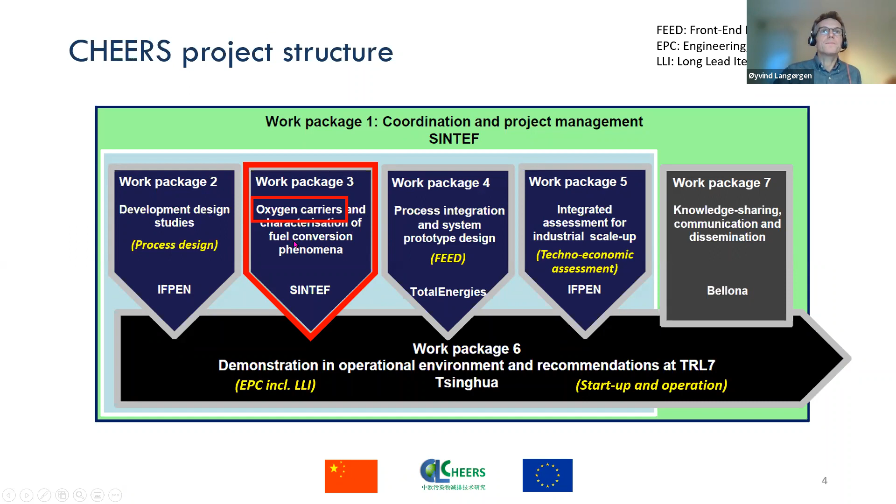The oxygen carrier material is in fact a cornerstone of the CLC process. It is normally in the form of metal oxide particles that take up oxygen from hot air in the air reactor in a highly exothermic reaction, generating heat. The oxygen carrier material transports the oxygen and the heat to the fuel reactor, where they are used to sustain the fuel conversion, which can be slightly endothermic or slightly exothermic, depending on the fuel and oxygen carrier chosen. In this respect, CLC belongs to the oxy-combustion CO2 capture technologies, but the oxygen separation is an inherent part of the process.

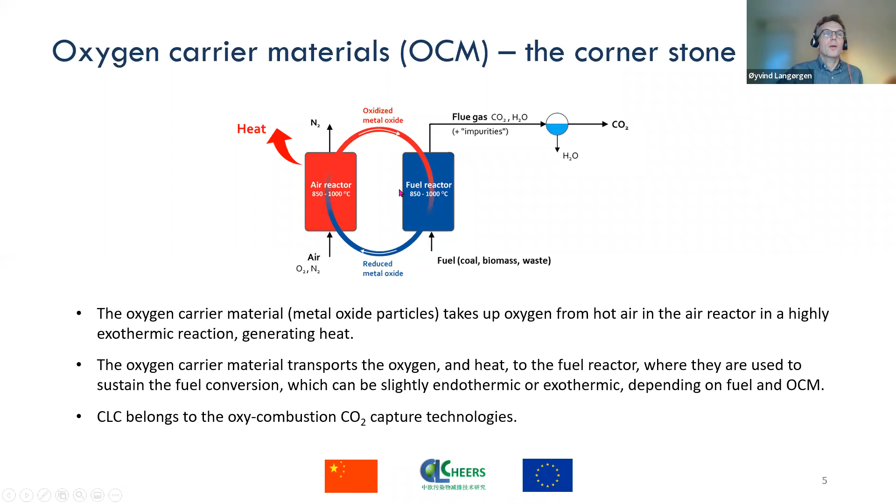CLC is most commonly realized using fluidized bed technology. So from this simple reactor principle, we go up to a very simplified scheme of two circulating fluidized bed reactors working together. And higher up in level, a real plant, such as this, which is the 3D model of the Cheers demo unit.

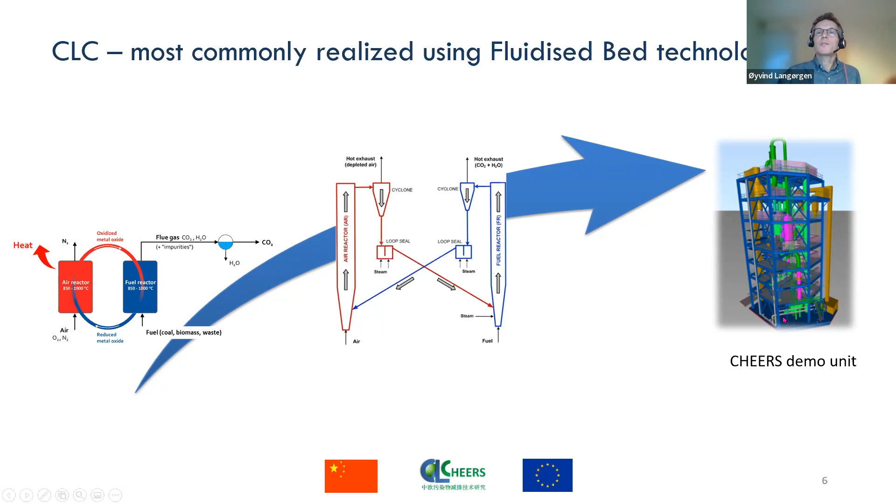The demo unit in Cheers has been made flexible, so it holds two different process configurations. A European configuration shown here, where the application case is steam and power generation in a refinery. The main feedstock is petcoke, which is very high in fixed carbon, low amount of volatiles. It also contains some sulfur. This design is from Total Energies and IFPEN, and you see we have a carbon stripper at the top of the fuel reactor, and we have L-valves to control the oxygen carrier circulation. Biomass is an additional or optional fuel that can be relevant.

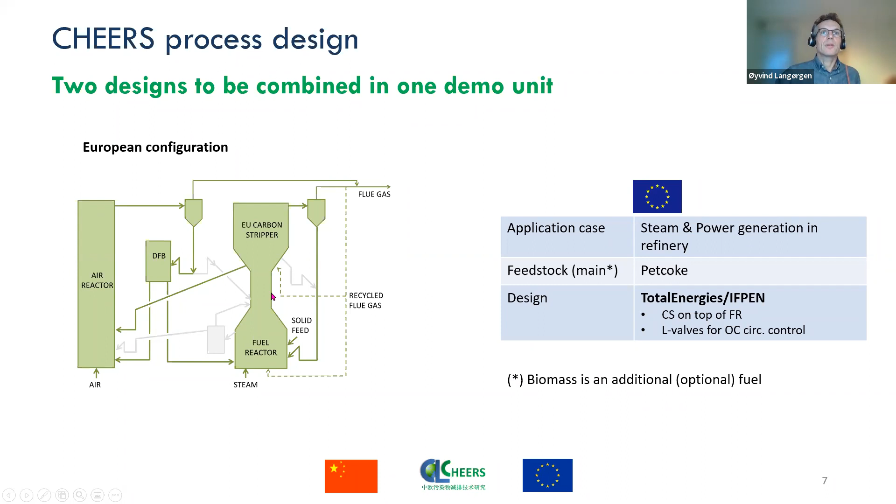Then we have the Chinese configuration using the same demo unit with some changes of the process lines. The application case here is power generation. The main feedstock is lignite, much more volatile content. And this design is from Tsinghua and Dongfang Boiler. And you see the carbon stripper is beside the fuel reactor, and the oxygen carrier circulation is controlled by fuel reactor overflow.

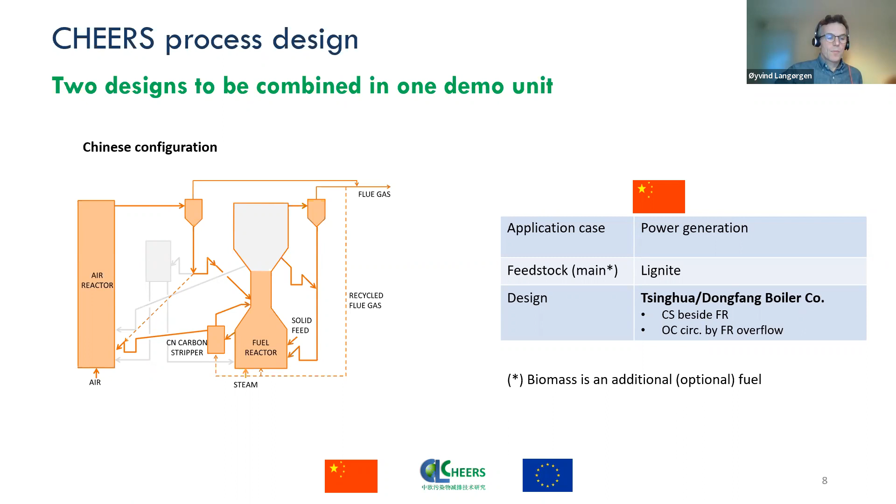Okay, so a little bit about the agenda for the rest of the presentations. We started out with a lot of candidates, both acquired natural ores and some synthetic materials that were manufactured within the project. And the main results of this first screening of these candidates will be presented by Yngve Larring at SINTEF Industry.

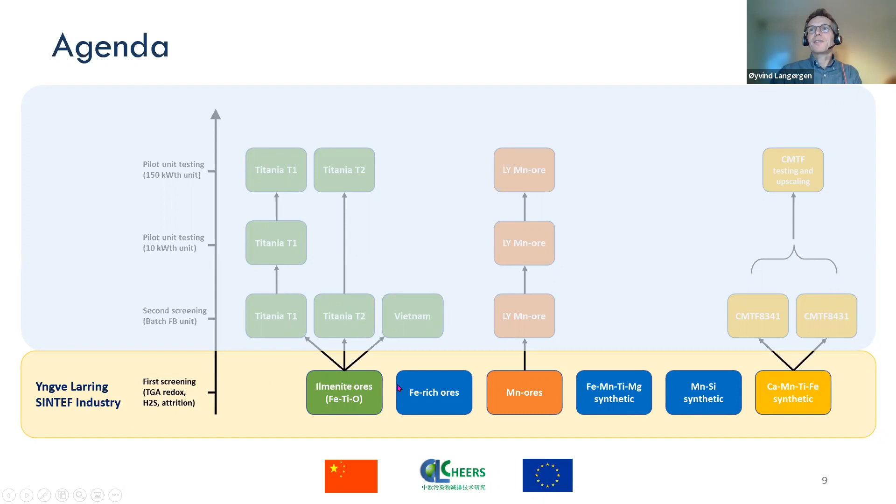Some of the candidates were taken further to a second screening in a batch fluidized bed unit, both natural ores and also some of the synthetic materials, the perovskites here. And from this, some were tested also in a 10 kilowatt unit at IFPEN. And this will be presented by Kristina Bakoc.

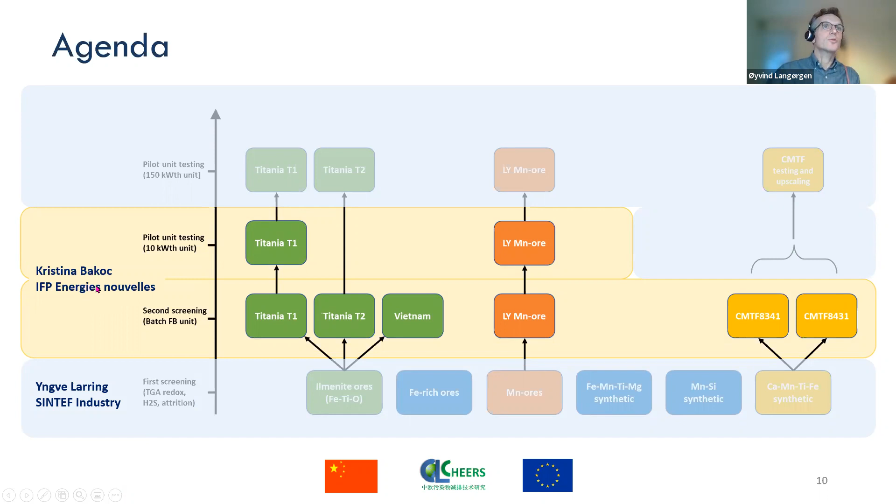Then Inge Saanum from SINTEF will present test work that has been done on a 150 kilowatt unit at SINTEF, where these natural ores, minerals, have been tested. Yes, but we have not forgotten the perovskite, the synthetic material either, so it is followed up at Tsinghua University, and the results from this work will be presented by Lei Liu from Tsinghua.

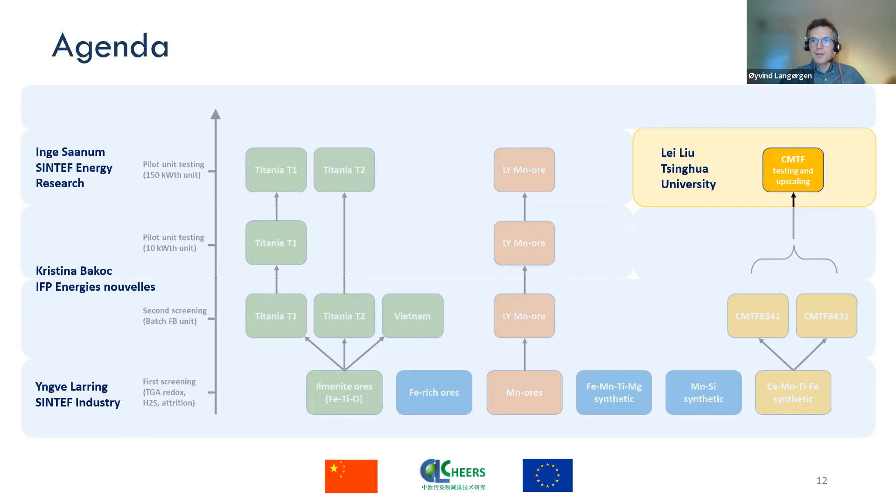Yes, I think this was in short a first overview here. So then I would like to give the word to Yngve Larring at SINTEF Industry.

And thank you. Give him the control here. Yes. Can I have the control here now?

Yes, SINTEF's task was the pre-screening of minerals and synthetic material, and to look at the lifetime and performance under the conditions given in the project. The work I will present here is done mostly by Swan, Martin Sunding, and me.

So, there it comes. Okay, sorry, it was a bit late.

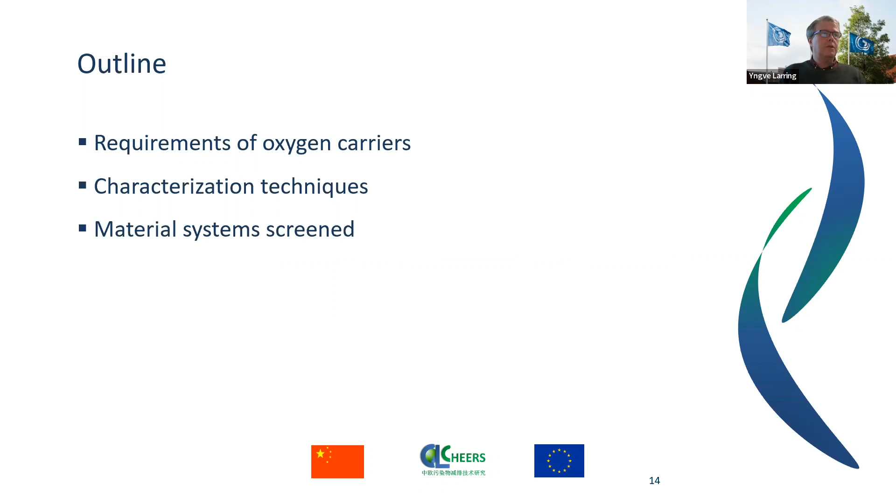The outline will be requirements of oxygen carriers, characterization techniques, and material systems screened. What requirements do oxygen carrier materials have in the process? This will always depend on the type of fuel, CLC design, and window of operation. In this case, we have a higher temperature than regular CLC. It's 950 to 1050. This is because there will be slower petcoke gasification and a need for higher temperature for having an efficient process.

This also gives a need for a suitable enthalpy of oxidation for the material, meaning that you have active lattice oxygen in the window of operation. And it should also have a reasonable oxygen transfer capacity, circa 3%, for example, because if it's too high, it can also be very detrimental, giving mechanical stress to the oxygen carrier, which will then reduce lifetime.

Good kinetics for a specific process based on, in this case, long residence time. And OCM stability under redox cycles is also, of course, very important because it's also influencing mechanical strength and the attrition lifetime, which we want to be ideally at least 2,500 hours. And we need also to take cost and lifetime aspects of the materials into account as well. Often higher cost means higher lifetime, sometimes.

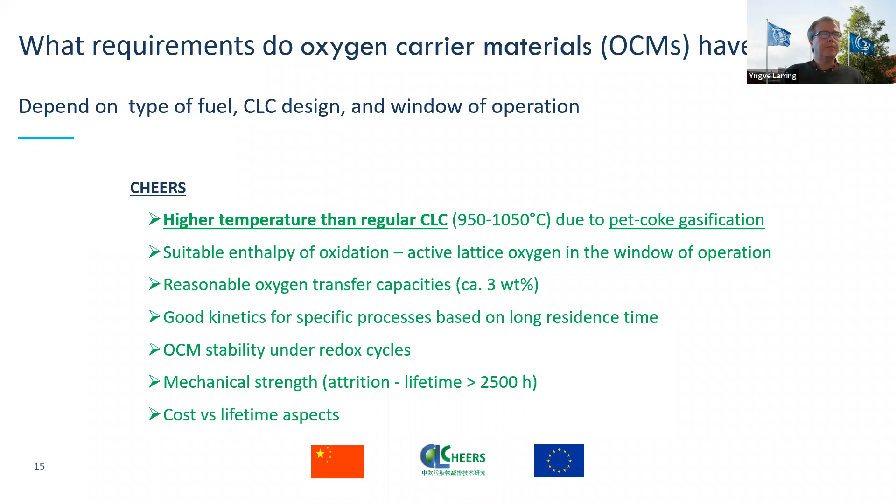Parameters investigated during screening were oxygen transfer capacity by thermogravimetric analysis in various redox cycles, with pO2 stepping for equilibrium oxygen transfer capacities. We also did the reduction kinetics in thermogravimetric analysis and micro-reactor testing. And stability of the OCM we checked before and after testing by SEM and optical microscopy for characterization of the microstructure to see how it degrades, and also with XRD in some cases where this is needed. We also did mechanical strength, both by cold attrition and hot attrition.

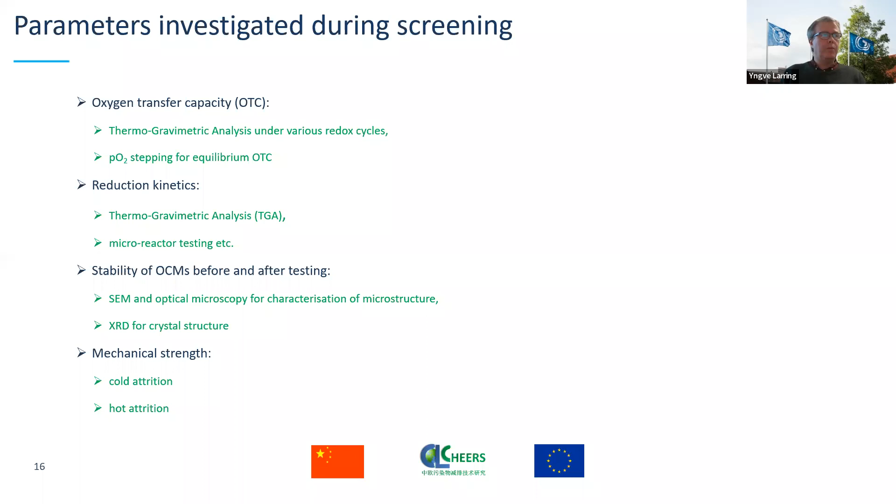The TGA is a very nice instrument where we can switch between reducing, inert, and oxidizing very fast and in a lot of different cycles. So we can have this automated, and in this case, which you will see later on, it goes between high hydrogen concentration and low hydrogen concentration, and also different oxygen concentrations, to look at how active it is under a CLC process, which has different conditions at the inlet and outlet.

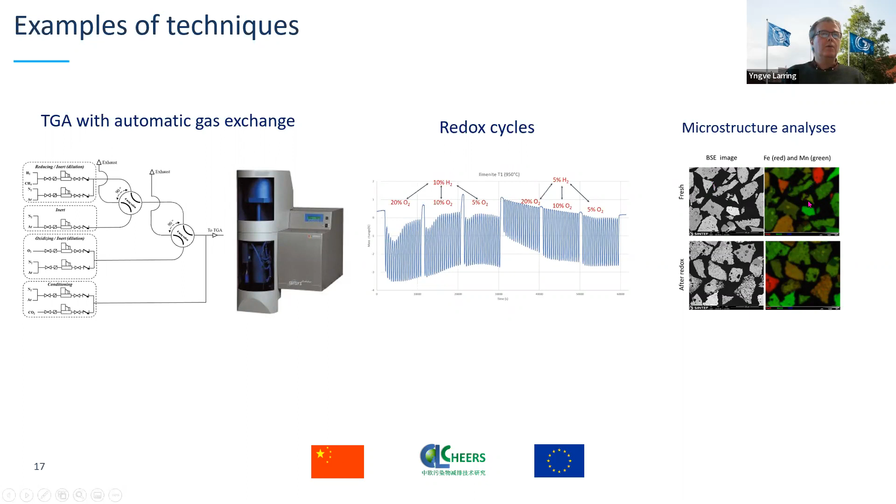We also did some microanalysis to see, for example, whether the iron and manganese are mixed or are separate particles, to get an overview of how the source is. For the minerals, we looked at different material systems: ilmenites and also iron manganese ores. On the synthetic part, there is iron titanium manganese, manganese silicate, and perovskites, which have been tested.

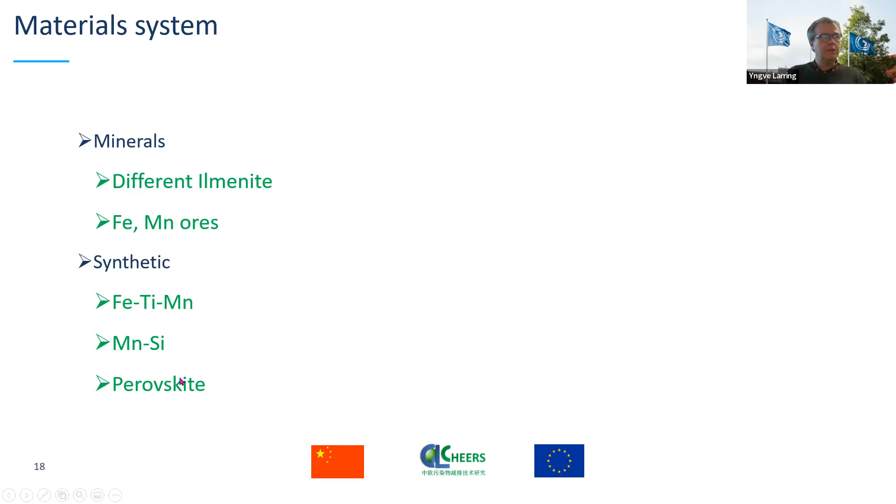So I think it jumped too fast. Yes.

When we look at the ilmenite from Titania AS in Tellnes, Norway, the first line here, we see that this works very nicely from 950 up to 1050, under all these conditions, and rather well. We see that there's still some activation ongoing at 950, but this is a good material which is stabilized after such tests. While with Vietnam and Mozambique, we see that these fail in our test at the higher temperatures, meaning that these are not very good materials for the system. They will have redox, but they will not be suitable candidates.

If you look at the rates of this ilmenite compared to other ores we have been testing before, we see that it has a decent capacity and decent kinetics. It's not as high as some of the other ones, but if you have particles swelling a lot, then they will also degrade very fast and show very high kinetics, which will fool you, because they will not be strong and the lifetime will be short.

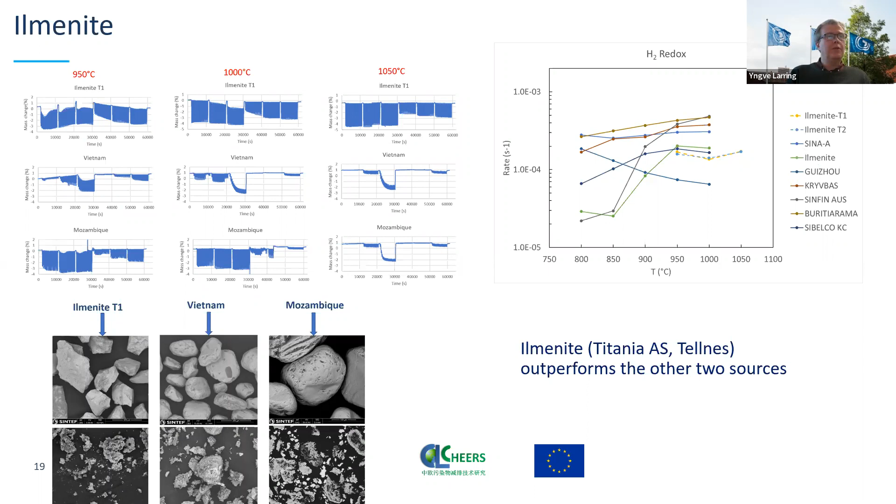We did some influence with petcoke. We treated it in gasification with petcoke first for a while, and then we ran the normal test protocol and compared it with normal ilmenite, which has not been exposed to petcoke. We see a little bit of decrease in capacity, but nothing detrimental, and we couldn't detect any other elements on the surface after the test either.

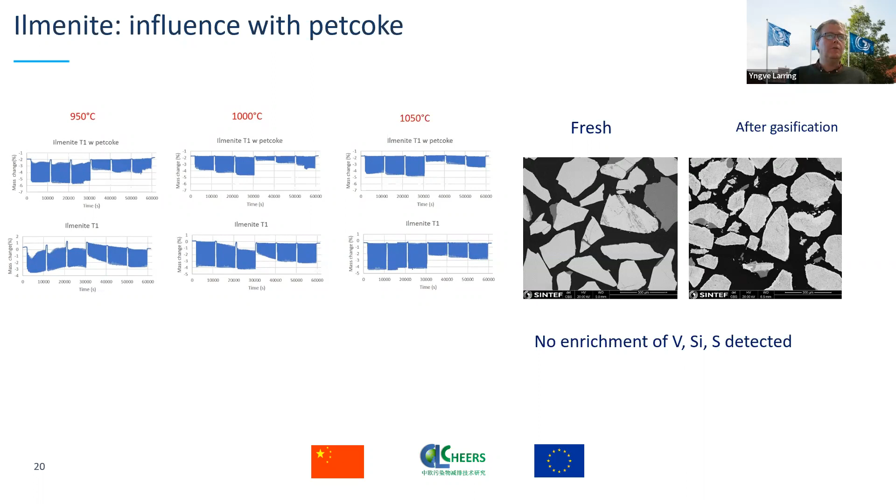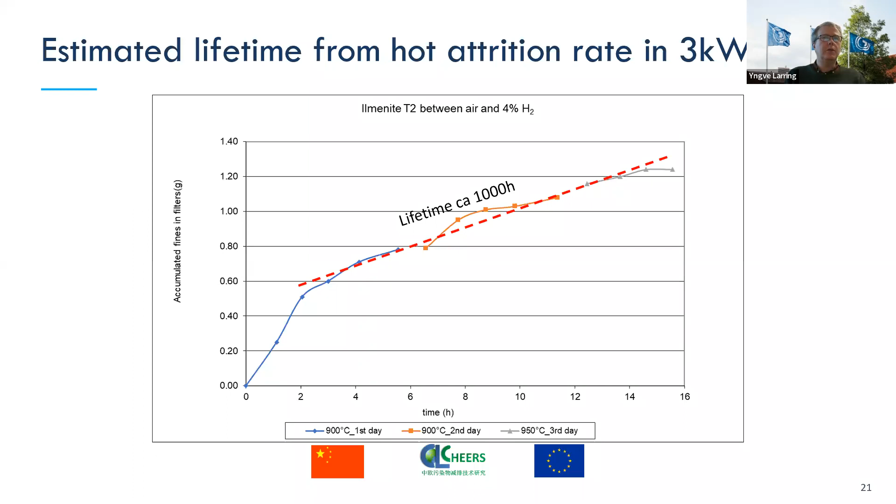But I think for these kinds of cases, you really need something operated for a long time in a reactor. They estimated lifetime from attrition rates in the 3 kW rig, getting a lifetime around 1,000 hours for 4% hydrogen, and between 4% hydrogen and air. The lifetime will depend very much on the depth of reduction of this material. So it's a little bit hard to get a good number, but it might vary plus minus at least 200-300 hours depending on the operation.

For the manganese iron ore, we looked at 3 ores from China. The first two have high iron content, and the last one has high manganese content. The iron-rich ones show very good capacities, but the strength is very low because iron cations diffuse very fast at high temperatures. It gives swelling and very fast degradation. The Mn one showed better stability and still a decent capacity, so this was tested further as well.

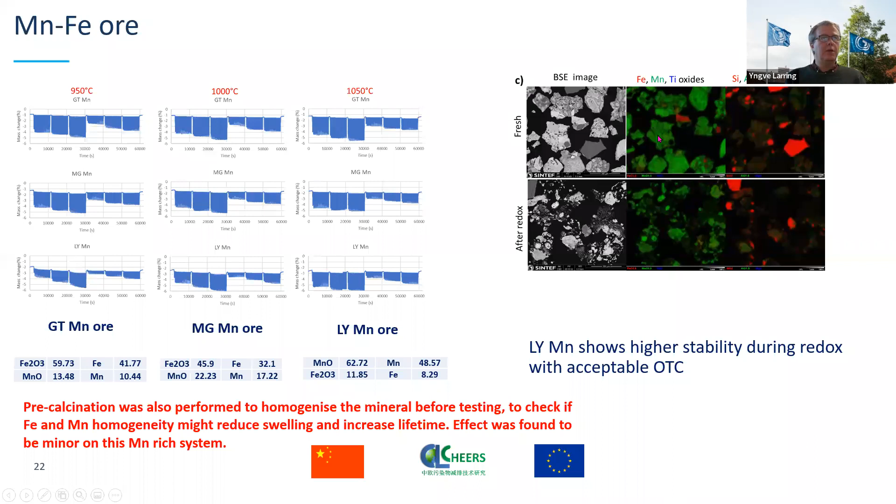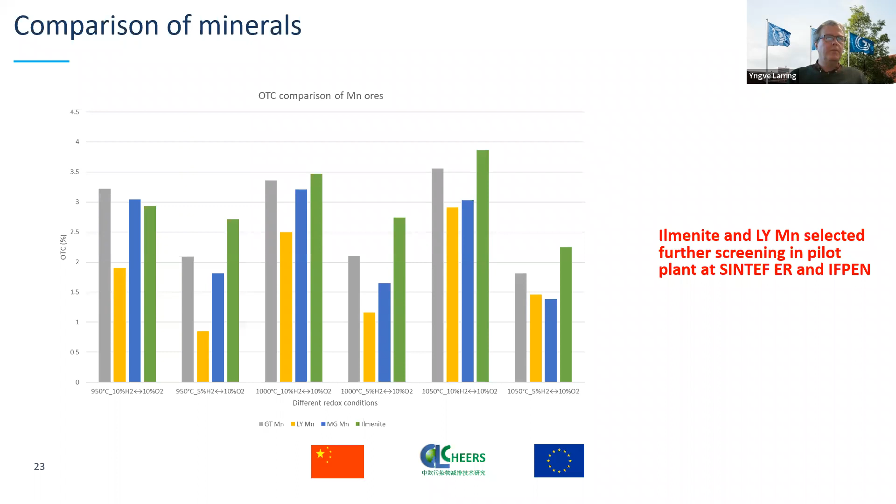We did a pre-calcination as well to homogenize it because, as you can see on some of the fresh samples, the iron and manganese are in different places, so we wanted to homogenize it and also react with other species in the sample. Even though from this slide it's not too easy to see which one to select, based on several criteria the ilmenite with a good oxygen transfer capacity and the one with slightly less oxygen transfer capacity were selected, also based on the lifetime of these materials and how they looked after the initial test.

When it comes to synthetic oxygen carrier materials, we have the spinels and the perovskites. The spinels show very good and even capacities and very good stability. But it was a little bit hard to get them very homogeneous in the process we used, because we mixed ilmenite and manganese. If you take that into consideration and the cost of production, ilmenite will be a cheaper source, and this will have a problem competing with it based on lifetime, which is not extended much compared to the raw materials.

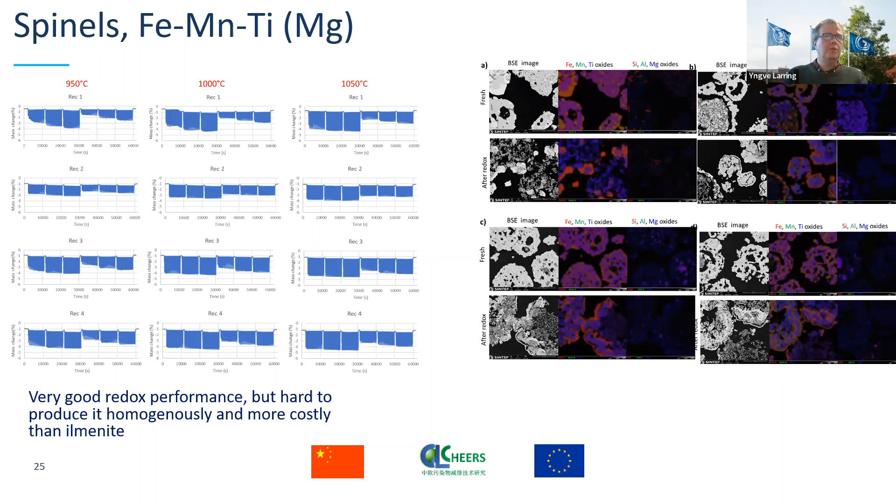For the perovskite, we made 3 different ones, with different compositions of manganese, titanium, and iron. The advantage of perovskites is that they can be tuned to a much higher degree to get higher stability, more or less capacity, and a change in where they release oxygen, whether you want CLOU or CLC. We want high phase stability, because then we have a long lifetime, a decent capacity, not too high, relatively good reactivity, and a longer lifetime than the other ones.

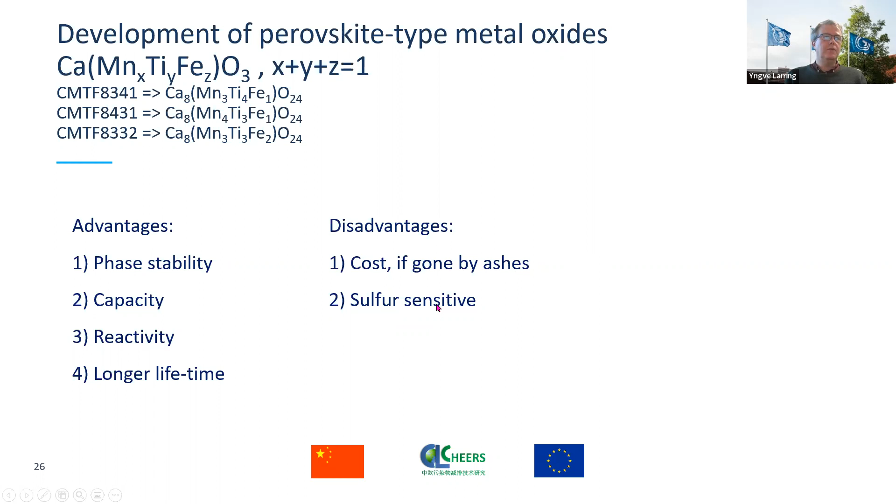The disadvantage is, of course, cost, especially if it's taken away by ashes, but petcoke has low ash content. It also has some sulfur sensitivity, which can be a disadvantage but not necessarily detrimental, depending on the process. The top perovskite shown here is the most stable one, with the most titanium dioxide. It has slightly lower capacity than the next two, which have lower titanium content. But in this one we didn't see any degradation in the microstructure, while this one shows some degradation of the microstructure. But still very decent after such a harsh test as this TGA.

So the 8431 showed really good performance and was taken further in China for upscaling, which will be presented by Lilu afterwards. 611 has been run successfully as a CLOU material, showing very good performance for methane combustion below 950. But this material does not work at 1000 and 1050, meaning it's very important to design material that fits the purpose and the window of operation under CLC conditions.

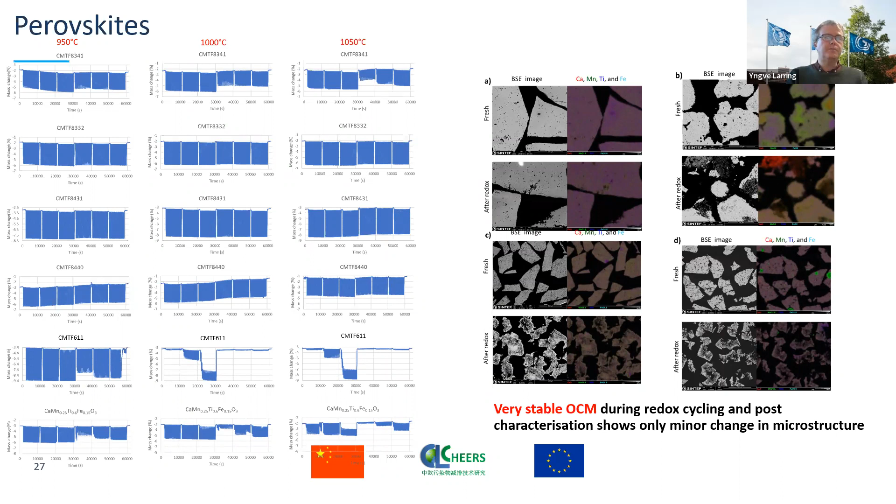The perovskite type, we have the 8341 and 8431, both react very nicely with the methane, CO, and hydrogen. The methane reaction should, of course, be wished to be slightly better, but sufficient, most likely.

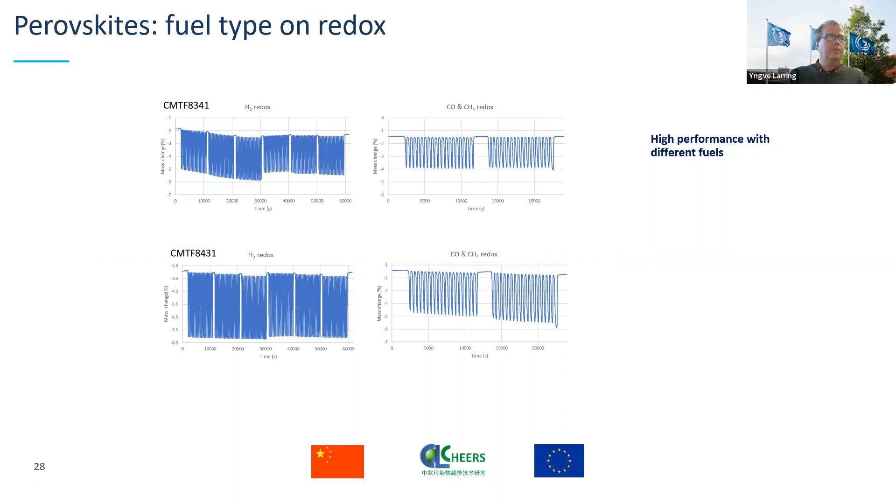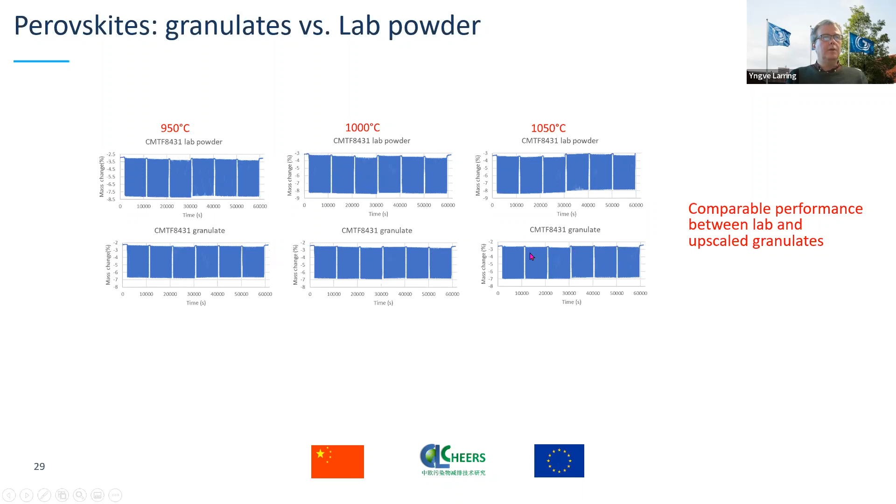And we checked also granulates versus lab powder, because we make powder in the lab, which is sintered and crushed or such things. But the granulates are made by spray granulation. And we saw that we get rather equal performance on the material, which is comparable, which is very nice. This also is small scale or kilo batches.

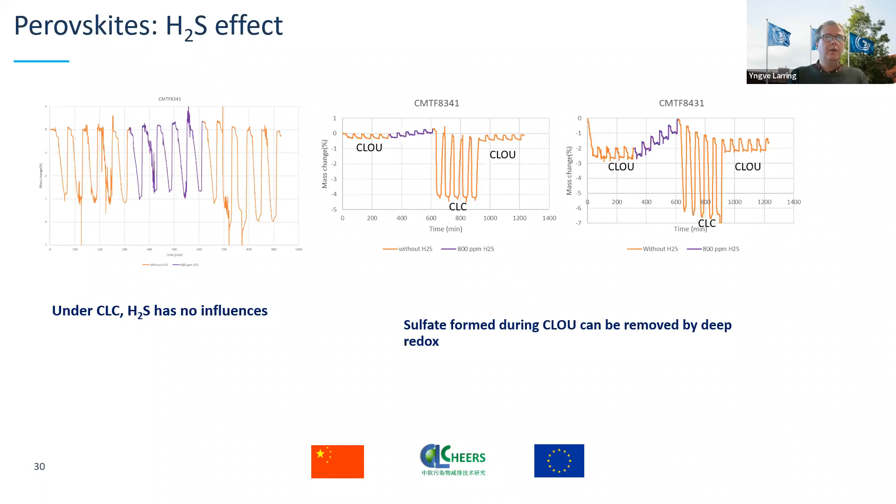For the CMTF 8431, it seems to be a little bit more critical. This one also has a little bit more change in microstructure, giving high surface areas and more sulfur absorption. But you see, this one also can be regained with some deeper redox, which is also the case of the project, where we do deeper redox rather than in the normal CLC type system we use at other places.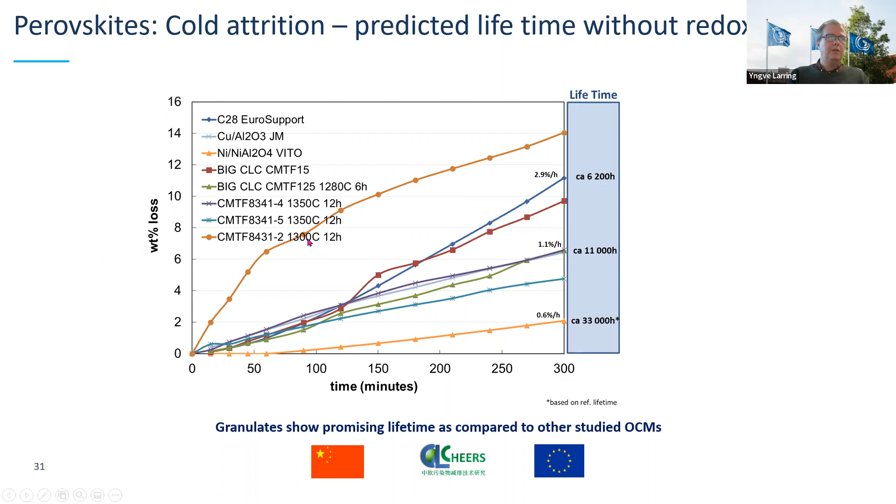We did some attrition testing of this material as well, and we see that they are equal to other good materials like nickel, nickel and copper. A little bit not fully as good as the nickel aluminate, but they are in the same range as a lot of other material tested before, meaning that they have a good strength. The one which has the least strength is the one with a little bit too low sintering temperature, making it a little bit less strong. So this is important to optimize.

And a summary of the screening of oxygen carrier materials is that the ilmenite from Norway has good reactivity. The strength lifetime is a little bit moderate, around 1000 hours. We should wish a little bit more. The cost is low, and the resource utilization is depending on how we look at it. We got a fraction from Titania, which we can use nearly all of. At least 85% in some of the cases.

But if you look at the total sieving of a whole system, you only utilize a small fraction of mineral from an ore, for example. Especially from the MG Mn ore or ore from China, you will always have a lot more dust in the MG Mn ore because it's easier to crush, meaning that you get a lower fraction which you can use for a CLC system in the long run. If you compare this with synthetic materials, where you can produce the correct fraction directly, that means less losses here.

The other ore is also good, moderate low strength, medium cost, and also synthetic here, high reactivity, high strength, but it's also high cost, or higher cost at least than the other one. And this last one as well, the synthetic one, because you need a fabrication part. But we should not forget that those ores need pre-sintering sometimes, crushing and sieving, which also makes them not as cheap as one often thinks. But the ilmenite we buy with low cost is already sieved and crushed, which is a big benefit for us.

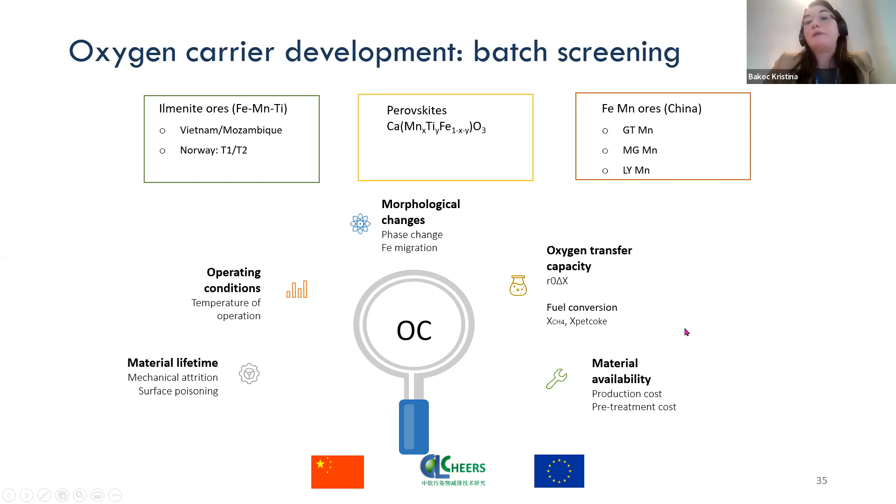Of course, what allows us the second level of screening, that is the pilot testing, is to actually assess the mechanical attrition of the material, which can be very important for the following injections of the material and the overall lifetime. And of course, it affects the OPEX of the process. Finally, we also considered throughout these tests the overall availability of the material. If it has to be produced, such as the synthetic ore, what is the overall production cost? Or if it is a naturally occurring mineral, what is the overall pre-treatment cost to actually put it online?

And again, the outlet gases would be analyzed with the same infrared analyzer, and the outlet flow rates would be measured as well. In this case, we wanted to check the performance of the oxygen carrier with the actual solid fuel, where there is an additional step of petcoke gasification, and that can significantly influence the kinetics of the overall system.

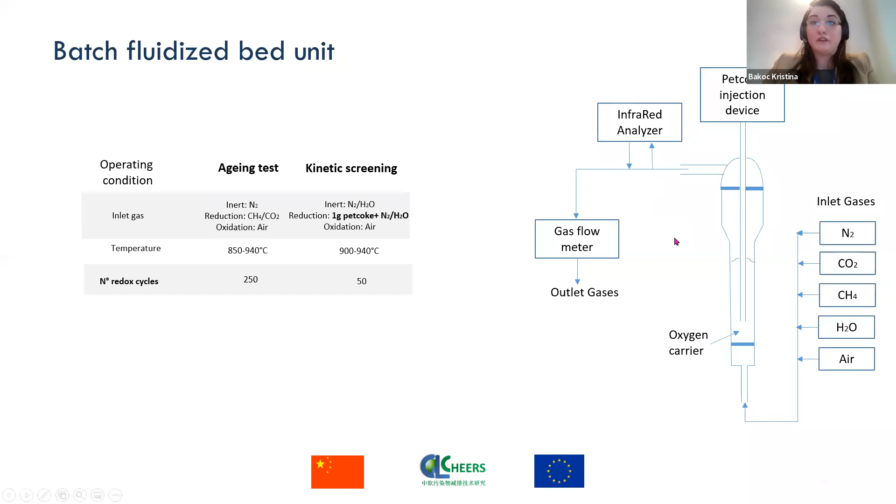Here, I give you the first results regarding the ilmenite ores. So following the batch screening, we found that ilmenite ores require a certain activation period, but after being activated, they achieve quite high values of conversion of methane, as well as this R0 delta X value, which means that the oxygen transfer capacity is quite high for ilmenite ores. As for the kinetic screening tests with petcoke injection, we found that they give satisfying reactivity, and in the conditions of higher water content or higher temperature, they would have better petcoke gasification.

Out of all the ilmenite ores tested, Titania ores performed the best. However, we still had to make the choice between the ilmenite T1 or T2 material. They are quite similar. They come from the same mine, so composition is almost the same. However, ilmenite T1 has higher water content, which leads to the fact that ilmenite T2 shows higher agglomeration affinities. And this could be problematic in the condition of continuous circulation.

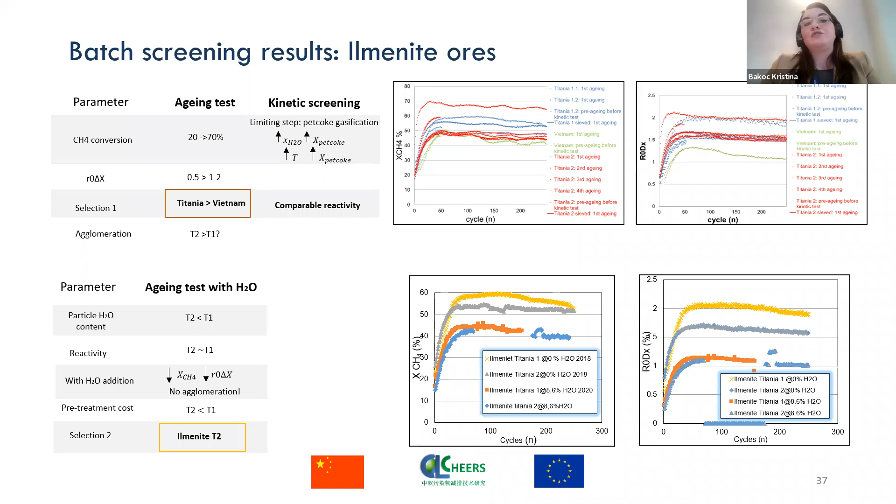So we decided to perform additional aging tests where different water contents would be added to the inlet fluidization gases. In this case, we desired to compare once again the performance of ilmenite T2 and ilmenite T1. What we found was that upon addition of water, there were no longer agglomeration issues with ilmenite T2. And since overall pre-sieving and pre-treatment is significantly cheaper for ilmenite T2, we would say that overall reactivity is high enough that we can suggest ilmenite T2 for further tests.

Following with the results of perovskites, they are the only synthetic materials. And as you can see here, they have no activation periods that were noticed during the aging tests. However, for similar gas flow rates, somewhat lower methane conversion was observed than with the previously seen ilmenites. Also, we have found a certain decrease in activation for repeated redox cycles. And for this reason, we decided to perform additional kinetic screenings.

What this has shown us is that upon multiple petcoke injections, there is certain sulfur adsorption on the surface of these materials. Since perovskites have low porosity, this leads to lower interactions on the surface of the material and overall lower activity. So in the case of the petcoke study, they would not be the best candidate for further tests. However, with a different fuel, given the high values of oxygen transfer capacity, they could still be a very good candidate.

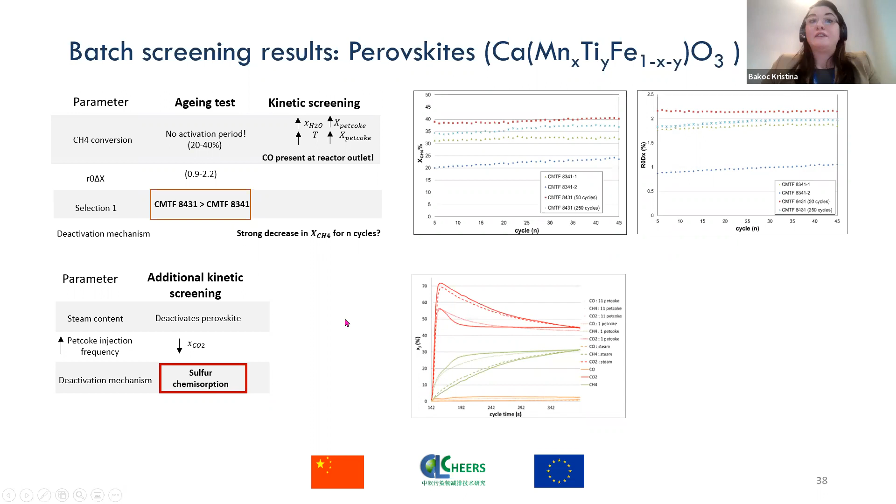Following the results of LYMN ores from China, we see similar trends of activation as with ilmenite. However, the values for methane conversion are somewhat lower. Still, overall reactivity is quite satisfying, with one important addition: during characterization of the material after activation tests, we noticed a certain increase in particle porosity, which could indicate higher affinity for attrition, important for particle lifetime overall.

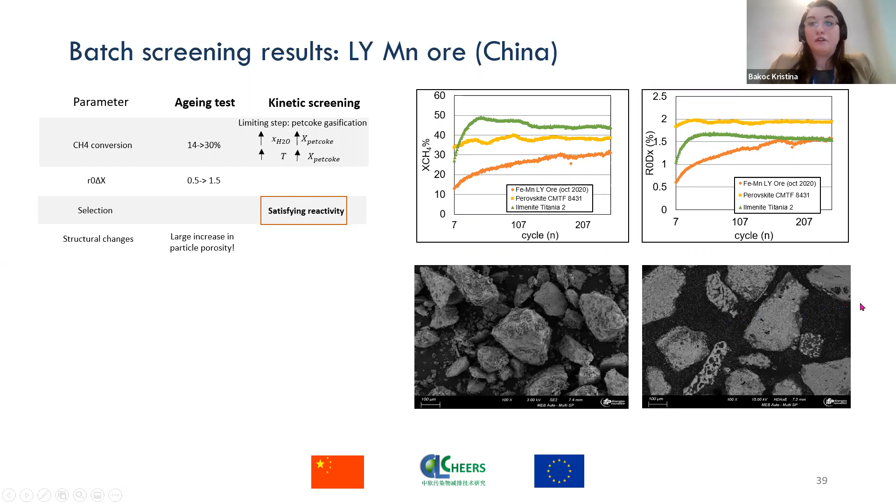Following the tests in fluidized batch reactors and the first screening, we decided to perform additional tests in a 10 kilowatt pilot unit, which allows for continuous operation. As a representative of ilmenite ores, we chose Titania T1, since T1 and T2 have very similar performance. From iron manganese ores, we would test the LYMN, since the goal of this level of screening was to find the best possible candidate for the petcoke study, and of course propose it for operation in the 3 megawatt demonstration unit.

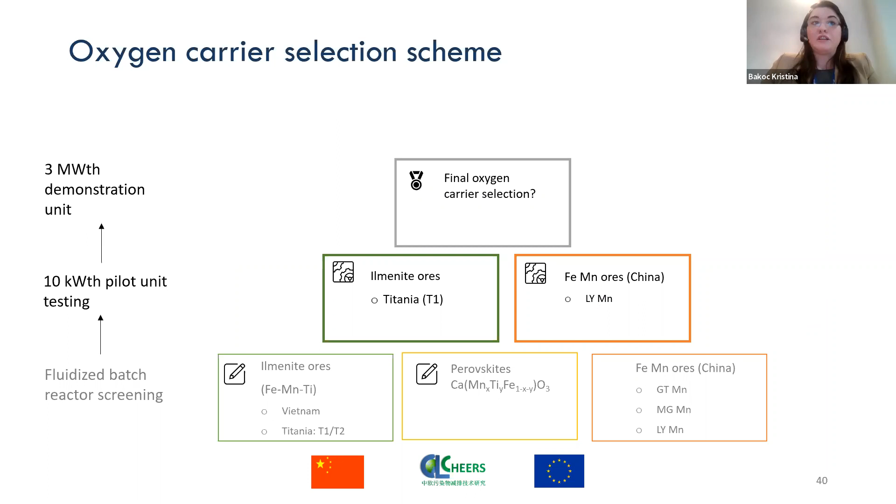The entire system is fully optimized, where the most significant operating conditions followed throughout this test are the temperature of the fuel reactor, the flow rate of the inlet gases that could be adjusted, the methane concentration to adjust the level of reduction in the case of gas fuel tests, and of course the flow rate of oxygen carrier itself, which has to be ensured to be continuous.

What is important for this unit is that it allows us closer representation of the lifetime of the oxygen carrier at the actual unit, and it can show us the agglomeration potential of different oxygen carriers.

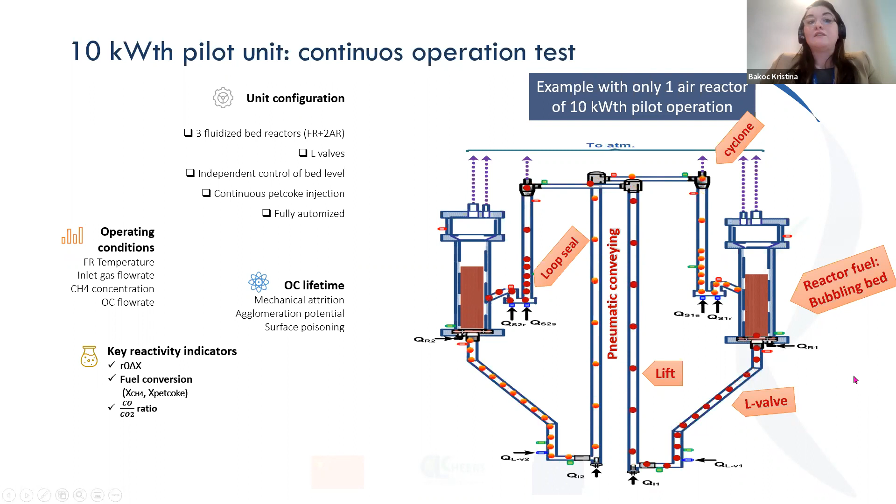Throughout the entire test in the pilot unit, we closely followed the key reactivity indicators, which are once again the values of R0 delta X, or oxygen transfer capacity, different fuel conversions targeted to be as high as possible, and also the ratio of CO to CO2 at the outlet of the fuel reactor, which we aim to be as low as possible to indicate good gasification of the petcoke.

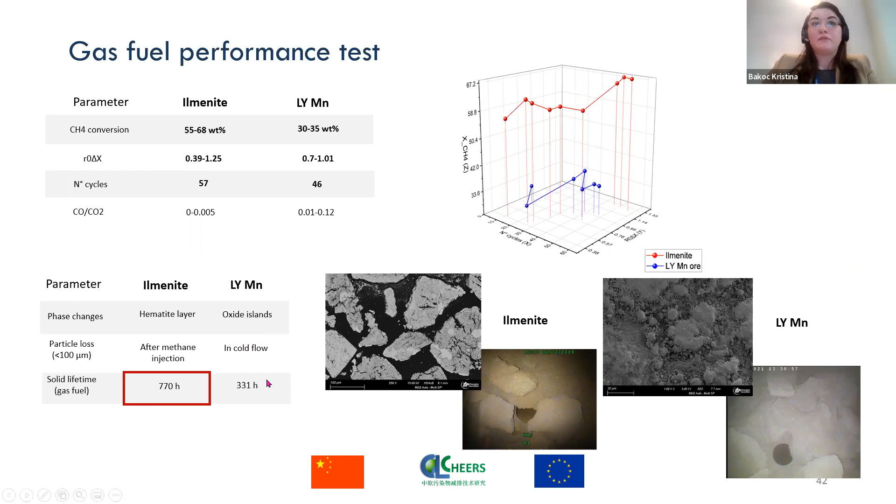So based on this gas fuel performance test, ilmenite seems to behave better.

However, additional solid fuel performance tests were performed, and the reason for this was twofold. On the one hand, we wanted to also test for the values of petcoke conversion and oxygen transfer capacities, but also we wanted to find the best indicators for the operation, which would help for operating the actual demonstration unit at the large scale.

So what we found was that the fuel reactor temperature has, of course, a positive effect on oxygen transfer capacities, which is more pronounced in the case of LY Mn than it is for ilmenite. In any case, the trend is the same for both of these materials for the same parameter.

In the case of the steam content in the fluidization gases, steam content seems to have a much more pronounced effect when we operate with ilmenite, while during the operation with LY Mn, the effect of the steam content on the overall values of oxygen transfer capacity seems to be quite negligible.

As for the petcoke flow rate, as would be expected, if we provide more fuel, there is more exchange of oxygen. So we achieve higher values of R0 delta X in both cases.

However, for the oxygen carrier flow rate, we find that if we push for higher values of oxygen carrier flow rates during the operation, this will actually reduce the capacity for oxygen transfer. It makes sense since it would probably allow for lower contacting between the oxygen carrier and the actual fuel. So this is something that should be avoided normally during the operation.

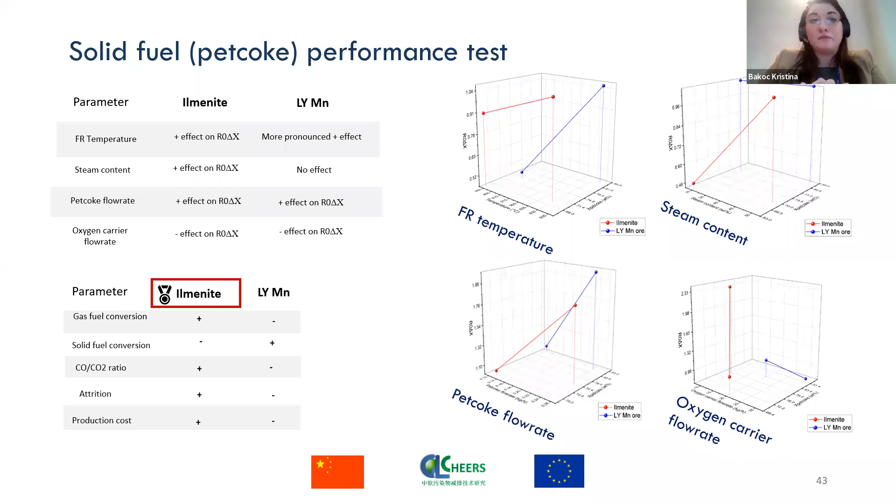Thank you very much, Kristina, for that. It's very good, interesting. Yes, still you can just use the Q&A and we will come back to you there. We'll progress further.

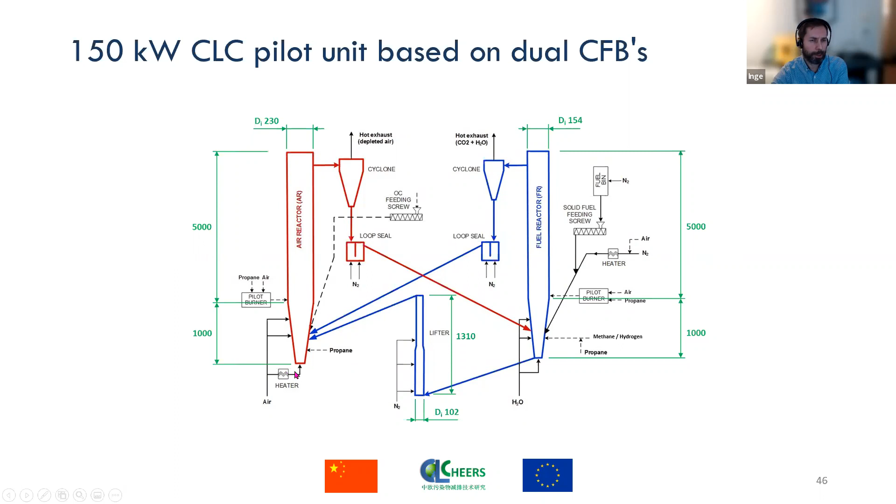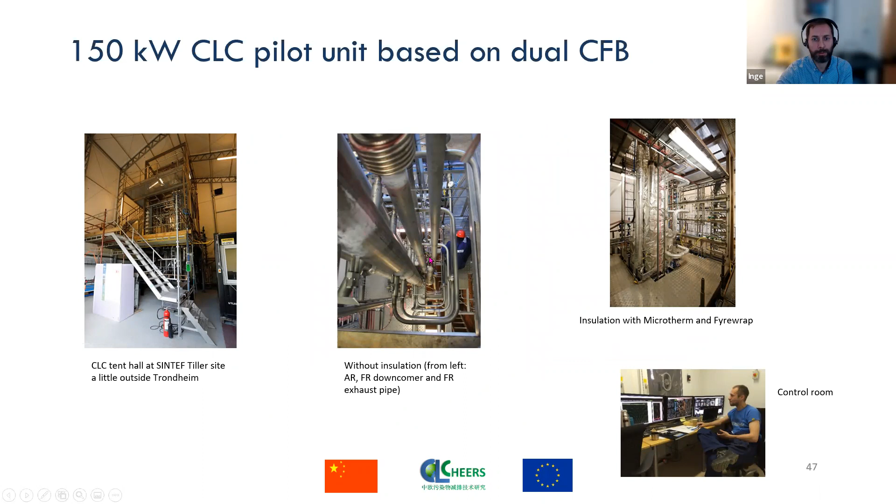Here we see some pictures of the reactor installed in this tent hall. This is before it was insulated from the top, and after insulation.

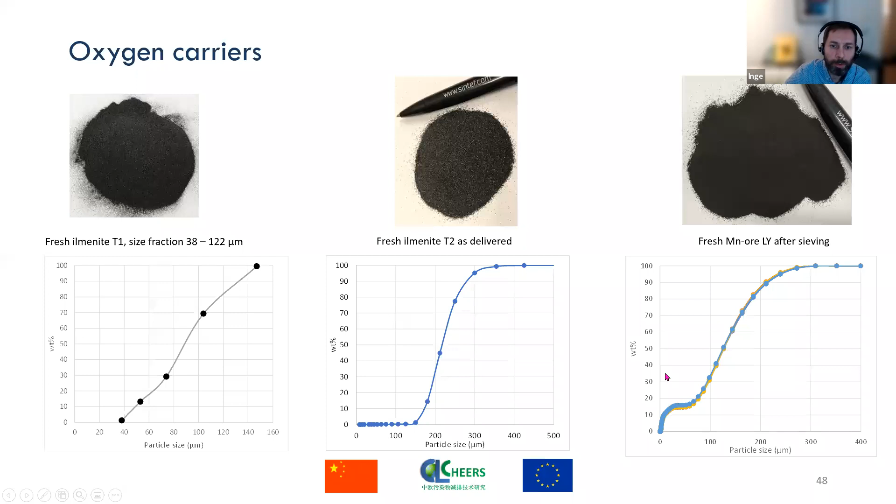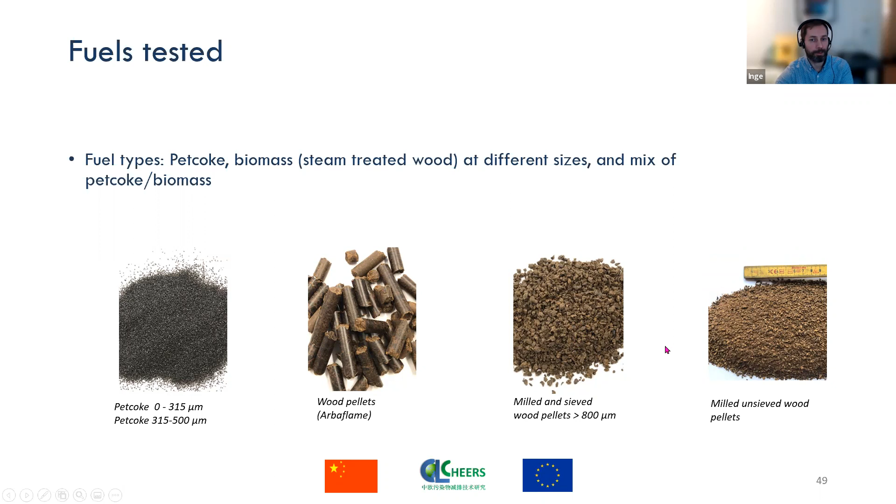As for the fuels tested, we tested petcoke with 2 different particle size fractions, and wood pellets from Arbaflame, which is brown because of a steam treatment in the production process. We tested 3 sizes of this: whole pellets, crushed and sieved, and crushed and unsieved, so with smaller particles.

So, some results. The 2 main parameters to evaluate the CLC process, I would say, are the CO2 capture efficiency and the fuel reactor gas conversion efficiency.

This is because quite a lot of the fuel is not gasified in the fuel reactor and is transferred to the air reactor, where it combusts and leaves the air reactor as CO2.

The fuel reactor gas conversion efficiency is convenient because it's only dependent on the gas composition, which we can calculate from the gas composition out of the fuel reactor. It's defined through the oxygen demand, which is the ratio between the oxygen needed to convert the unconverted gases and the stoichiometric oxygen. The gas conversion efficiency is then 100% minus the oxygen demand in percent.

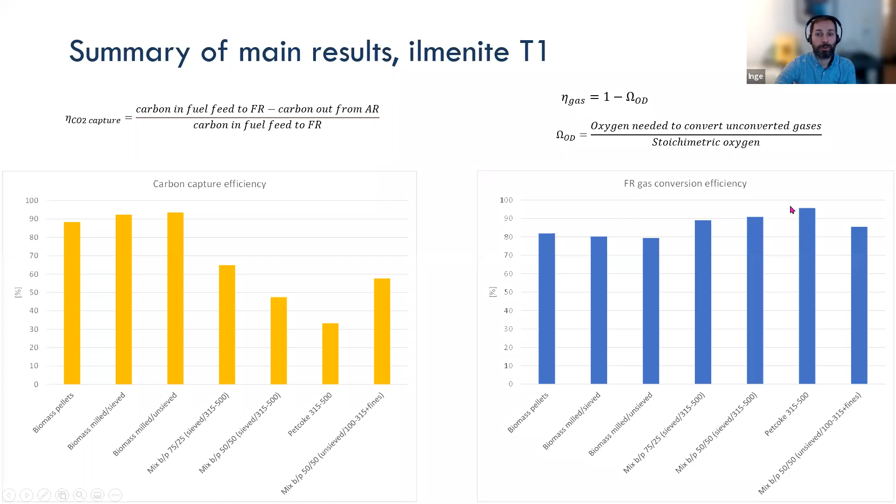Here we see the same figures, only here all 3 oxygen carriers are included, for biomass and petcoke. The carbon capture efficiency was high for all oxygen carriers when using biomass as fuel. When using petcoke, it was low, but it seemed like the manganese ore was a bit better.

For the gas conversion efficiency, we saw that the manganese ore did not perform as well as the ilmenites, both for biomass and for petcoke, more pronounced with the biomass.

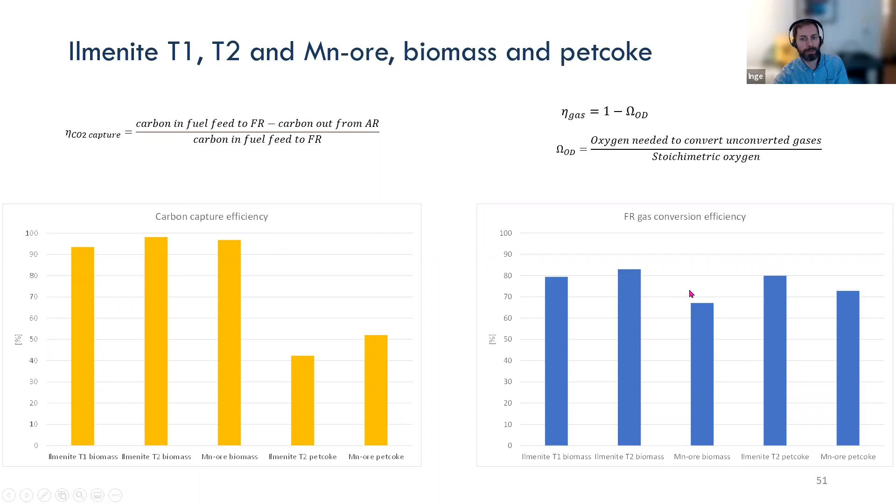If we look at the 2 comparable experiments with ilmenite and manganese ore using wood as fuel, we see the gas composition out of the fuel reactor. For instance, looking at the yellow curve, which is CO, with ilmenite we were at 6.5% CO, but with the manganese ore at quite similar conditions, we were up to almost 17%. We also see it on the methane and the hydrogen.

This is actually in line with what IFP found, that the gas conversion was not as good with the manganese ore.

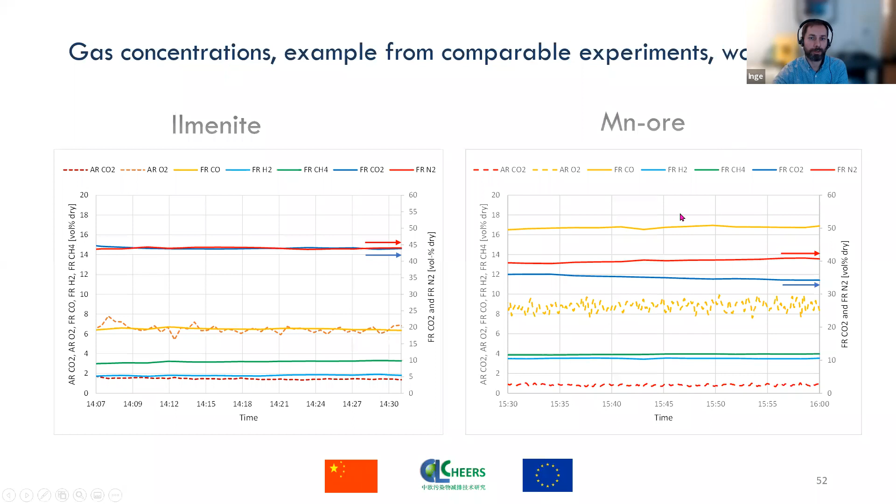We also did stress testing to see if there were problems with agglomeration with the ilmenite T1 particles. We did this by heating up the reactor and running in CLC mode at high temperature, using hydrogen and propane as fuel. We tried to run it so the particles would be as reduced as possible, as that is when there's the most danger for agglomeration.

We suddenly stopped the fluidization by pushing the emergency shutdown button, and let the particle beds lie still for up to 50 minutes. Then we tried to fluidize it again to see if it was only 2 big lumps, one in each reactor, but we managed to fluidize it every time.

But when we emptied the reactor after the test, we found some agglomerates, but they were not very strong - they could easily be crushed with the fingers. We sent some of these agglomerates for analysis in Oslo.

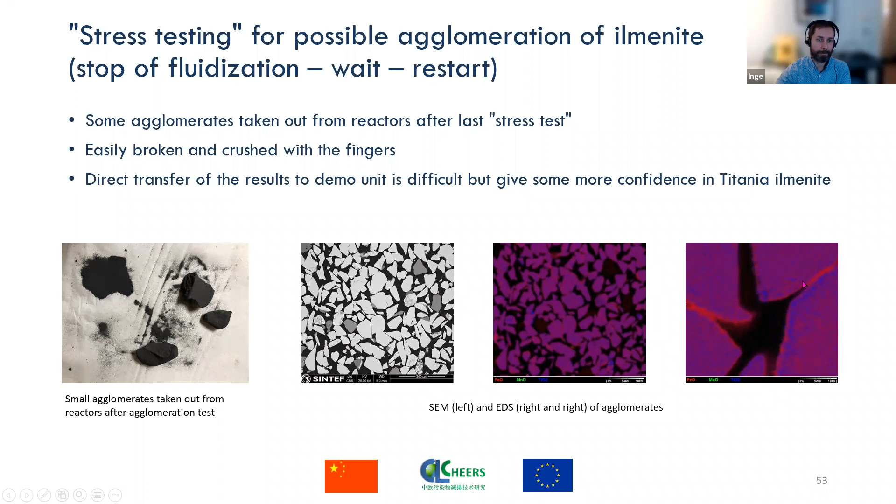Okay, so to sum up, high capture efficiency, above 90%, was achieved for all three oxygen carriers when using wood as fuel, but poor capture efficiency, 30 to 50%, for all three candidates when using petcoke as fuel, but that is because of our reactor design, with low residence time and no carbon stripper.

The fuel reactor gas conversion efficiency was around 80% for ilmenite, but below 70% for the manganese ore with wood as fuel. And ilmenite does not seem to have a high propensity to agglomerate, at least not in our rig, although some agglomeration was observed after stress testing.

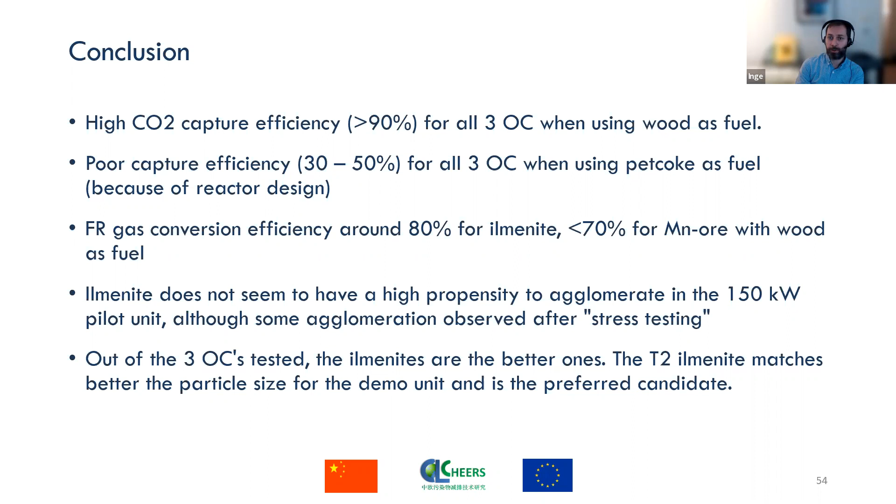So out of the three oxygen carriers tested, the ilmenites performed better, and the ilmenite T2 matches the particle size of the demo unit and is therefore the preferred candidate. Thank you.

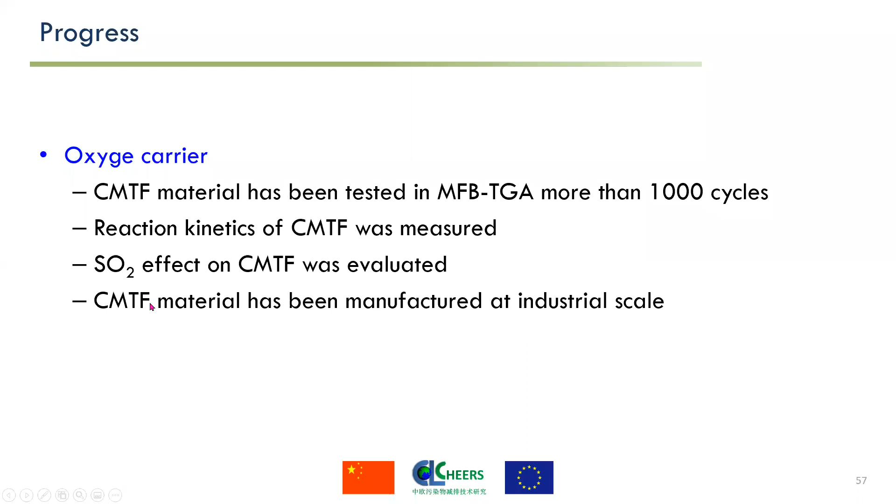In the CHEERS project, we focus on studying CMTF as oxygen carrier, mainly from four sections, including long-term oxidation and reduction cycles in MFB-TGA, the reaction kinetics of CMTF, and the sulfur effects on CMTF. Finally, we realized the industrial scale production of CMTF.

For a large-scale CLC plant, the oxygen carrier must possess some chemical and physical properties. For example, the oxidation kinetics determines the solid inventory, pressure drop, and fan energy consumption in the air reactor. If the oxygen carrier can release 0.2 to 0.3% oxygen in the fuel reactor, that is a key property. The released oxygen can oxidize the unburnt gas in the fuel reactor.

Also, the oxygen carrier will not agglomerate even if deeply reduced at a high temperature in the fuel reactor. Also, the oxygen carrier must be low price and non-toxic. There are no expensive and toxic elements in the material.

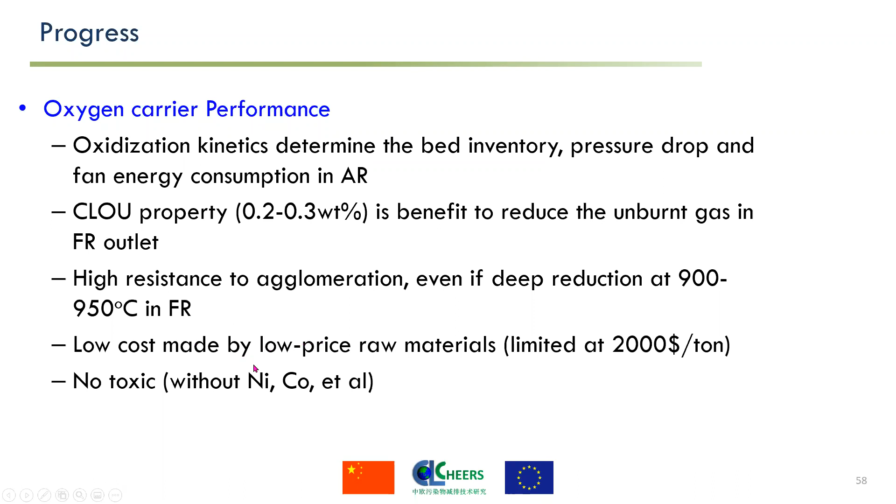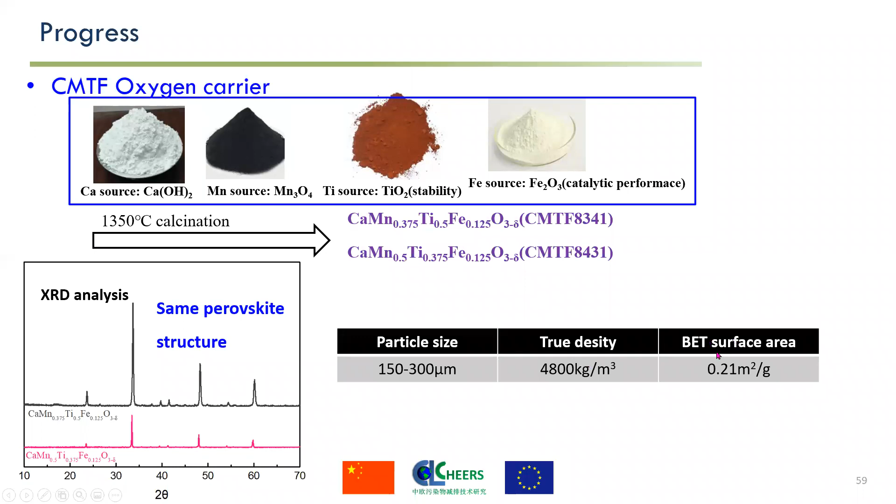Based on the above performance, SINTEF developed some CMTF oxygen carriers and sent two of them to Tsinghua University for research. This material consists of calcium, manganese, titanium, and iron. You can see all the elements and the raw materials are very cheap and low toxic. After calcination at 1350 degrees, a perovskite structure formed in the material, and the two oxygen carriers have a similar perovskite structure. The particle size, true density, and BET surface area are listed in this table.

Then we use the micro fluidized bed thermogravimetric analysis (MFB-TGA) to study the multiple cycles and the kinetics of CMTF. The core of MFB-TGA is the bubbling bed reactor. We add 350 micrograms of CMTF particles into the reactor for the redox kinetics test, and 3 grams of particles for the oxygen release test, and the other bed material is silica sand.

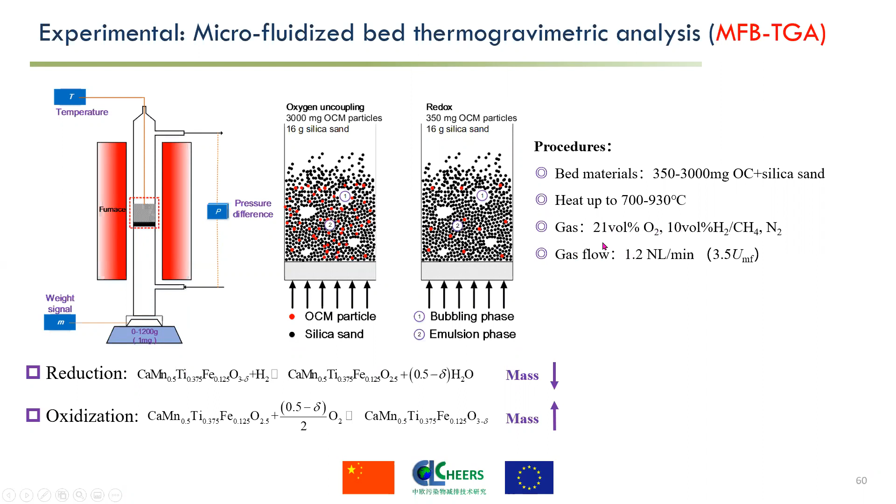During the reduction, CMTF will lose oxygen and its mass will decrease, whereas in the oxidation, CMTF gains oxygen and the mass increases. So the principle of MFB-TGA is to measure the real-time mass change during the gas-solid reaction, using a high-precision mass transducer to obtain the reactivity and kinetics at fluidized states. And then we obtain its reactivity at different temperatures and different gases.

Firstly, we carried out a long-term redox stability experiment for CMTF. In total, 1,000 cycles were conducted. CMTF has no decay in reactivity and low agglomeration during the whole test. Even if we stop the gas supply, there is no agglomeration.

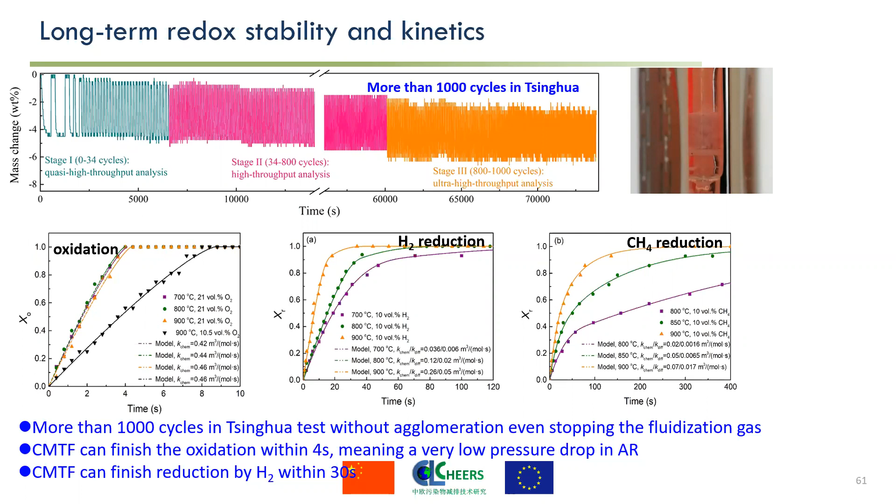Then CMTF has a very fast oxidation rate. It just needs 4 seconds to finish the oxidation. That means the needed residence time and bed inventory in the air reactor are very low, so the pressure drop in the air reactor is also very low. You can see CMTF also can be reduced fast by hydrogen, just needing 30 seconds for full reduction.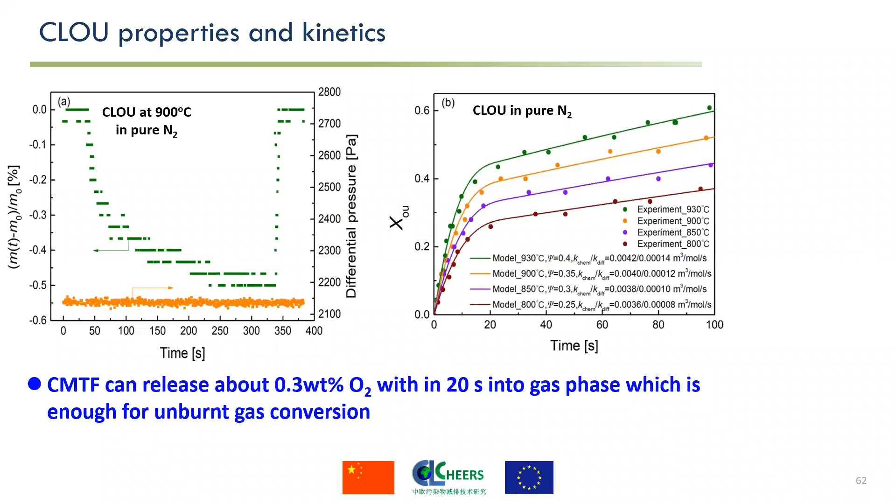We also find that CMTF can release 0.3% oxygen in the air reactor within just 20 seconds. So this oxygen can enhance the gas conversion in the fuel reactor.

Then we studied the sulfur effects on the CMTF kinetics at 900 degrees. Sulfur has almost no influence on the reduction rate. There is a benefit: sulfur can increase the oxygen transfer capacity. Also, because of sulfur, the oxidation kinetics decays by half, but the reaction rate is still fast enough. It just takes 8 seconds to regenerate 4% oxygen.

From the SEM images, sulfur can react with the CMTF to form sulfate, which covers the particle surface and further affects its reactivity.

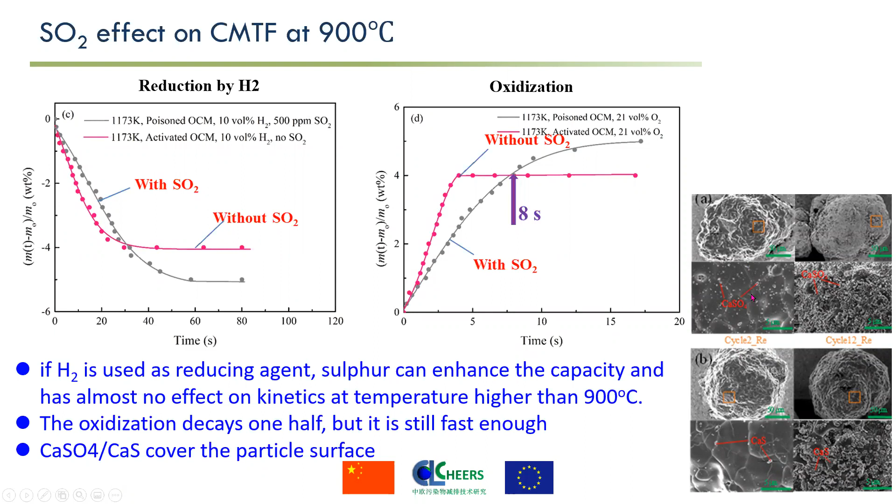In order to upscale the CMTF production, we explored a spray drying process to produce the CMTF at industrial scale by using conventional raw materials with high purity and moderate price to make a slurry in a mixer. And then we used a spray drying device to dry the droplets, forming the CMTF particles in the bottom.

Most of the collected particles are in the range of 75 to 500 micrometers. In the first stage, we produced a total of 1,000 kilograms of particles. The total price, including purchasing raw materials, granulation, and calcination, is close to $2,000 per ton.

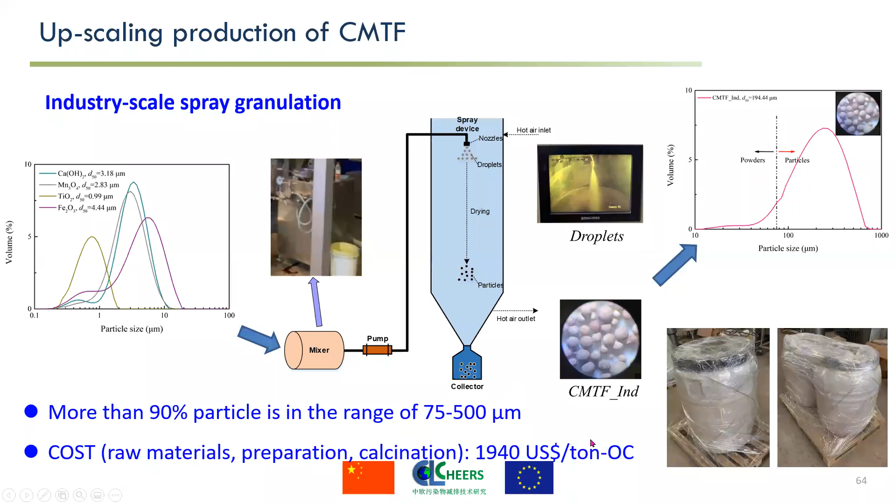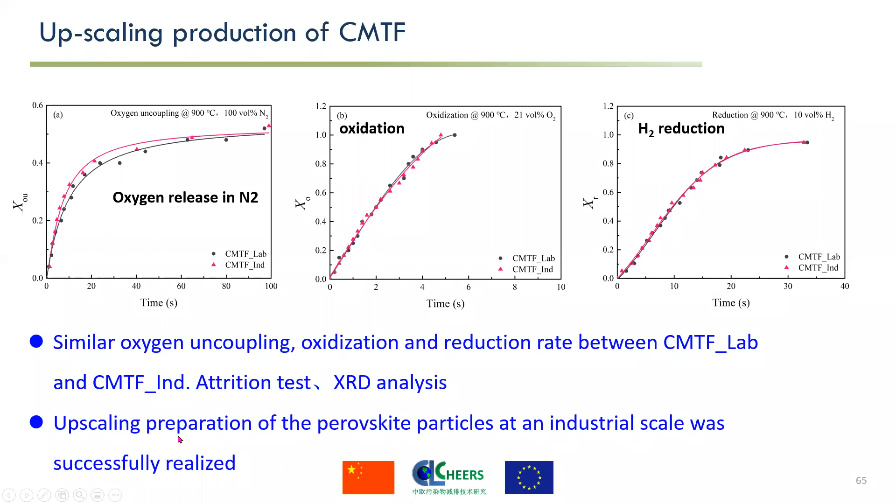Then we studied the industrial scale CMTF's kinetics and compared it to the lab scale CMTF. We find the industrial scale CMTF has a very similar oxygen release rate, oxidation rate, and reduction rate to the lab scale CMTF. Also, the attrition rate and the XRD results are very similar. So the upscaled production of CMTF is very successful.

Based on the reaction kinetics, we can evaluate the required bed inventory in the air reactor and fuel reactor. In these equations, the reaction rate is from the MFB-TGA results. Then, according to the bed inventory, we can calculate the bed pressure drop. As we know, the fan needs to overcome the pressure drop in the fuel reactor and the air reactor. So we can calculate the fan power by the equations.

We can see the results. The total needed bed inventory is 78 kilograms per megawatt. The bed inventory is too low just because we calculate the FR bed inventory by the hydrogen conversion, not according to the coal or char gasification.

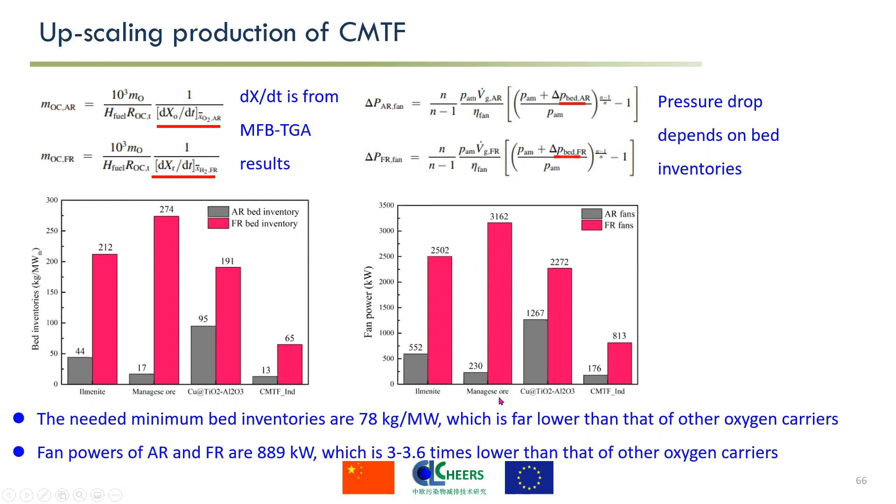But at the same conditions, the bed inventory is far lower than that of other oxygen carriers: ilmenite, manganese, and copper. Also, the fan power is 3 to 3.6 times lower than that of other oxygen carriers.

In summary, CMTF is a very good oxygen carrier without any agglomeration during 1,000 redox cycles. CMTF can be fully oxidized within just 4 seconds, meaning a very low pressure drop in the air reactor. CMTF also has faster reduction kinetics. CMTF can release about 0.3% oxygen in the air reactor with just 20 seconds for unburned gas conversion.

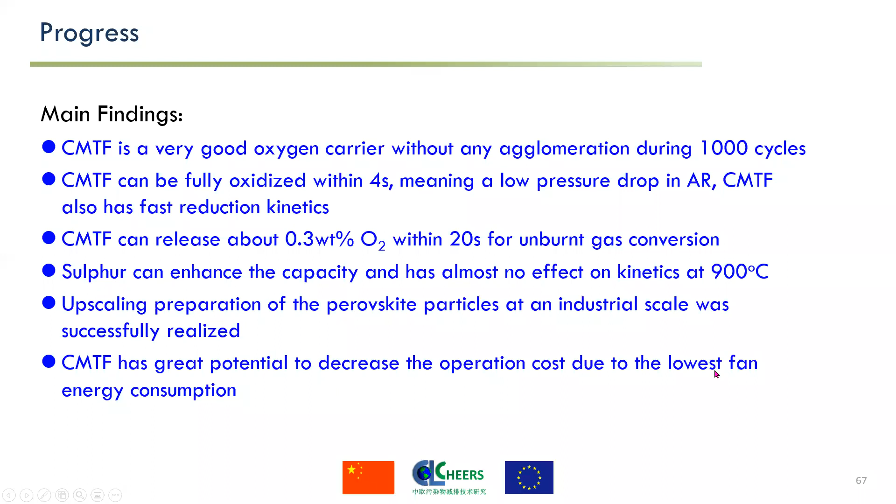Sulfur can enhance the oxygen transport capacity and has almost no effect on the kinetics at 900 degrees. Upscaling preparation of the perovskite particles at an industrial scale was realized. And the last conclusion is CMTF has great potential to decrease the operational cost due to the lowest fan energy consumption.

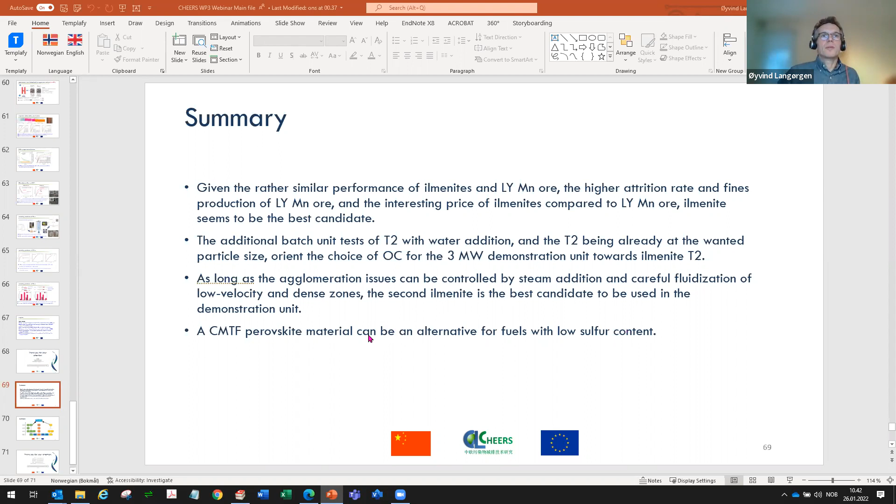So with careful fluidization of the systems, especially low velocity and dense zones like L-valves, and steam addition, we believe this can be manageable. However, we have also seen that the synthetic material, the CMTF perovskite, is a really good candidate and can be an alternative for fuels with low sulfur content. At least we saw in the petcoke tests that it was deactivated by the sulfur content in this petcoke.